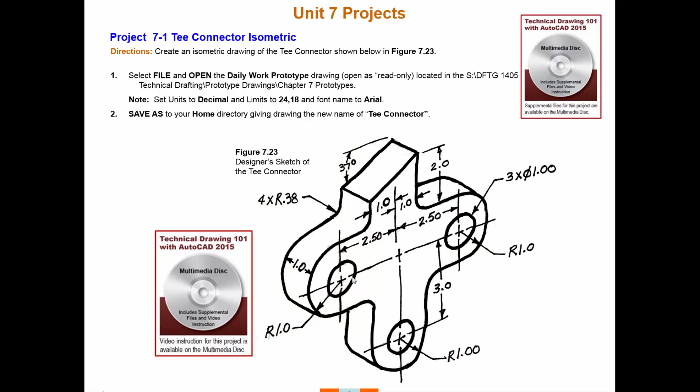So now that we've got this, looks good, let's go ahead and save our changes, and we'll come back into the drawing here. So this is what we're going to be drawing. You can see it's a basic T shape. If you flip the page, you'll see that what we're going to start off with is just your basic T, 5 by 3. So we're going to come back into here.

What we need to do first is actually get into the isometric mode. So I'm going to show you kind of the old school way to do it, and I'll show you the newer way to do it.

So when I'm setting up myself into the isometric mode, look at my crosshair right now. This is a regular, it's called the rectangular crosshair, rectangular snap, but it just looks like what you're used to. It's a vertical line and a horizontal line. If I were to draw a line right now and turn my ortho on, I'm locked into a perfectly horizontal line or a perfectly vertical line. I can't make it at an angle even if I tried. So we want to make sure that your ortho is on.

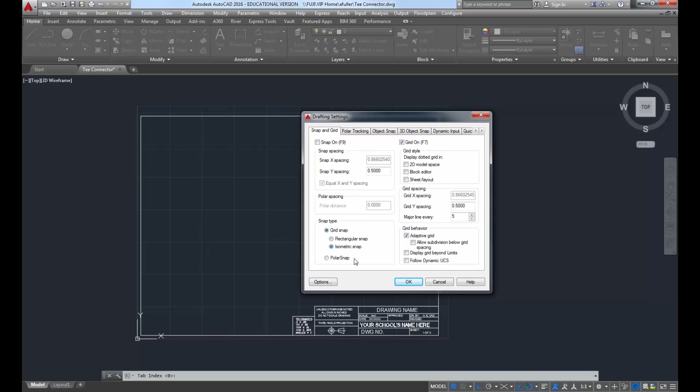We definitely want to use ortho when we're doing isometric. But we want to set ourselves into an isometric snap. So I'm going to click on this little button down here where my grid and my snap is, and I'm going to click on the settings, and I'm going to come in here. You can see I'm in rectangular snap. I can set myself to an isometric snap and say OK, and now look at my crosshair. So now I've got an isometric crosshair. So that's one way to do it.

I'm going to go turn that off just so you can see, put it back to rectangular and OK. So that's the way we used to teach it. But as of release, I think this changed in 2016, maybe 2015, they actually added it to the drafting settings down here.

So this guy right here, do y'all see this little button right there? This is how we can change it now. If you don't see that button, click on these little 3 bars right here to customize, and it is called Isometric Drafting. So this guy right here, if you don't see a check mark next to it, go ahead and click on it. If you see a check mark, then it is in your drafting settings toolbar down here. But what we're going to do now is just click on that little arrow next to it, and you can choose. We've got 3 options when we're looking at that crosshair.

So we've got ISO left, ISO top, and ISO right. Let's just select one and see. Notice how my grid is changing. This is what I was telling you. I'm going to turn my grid off because that's driving me crazy.

I'm going to draw a line here, and I've still got my ortho on. It's super important to keep that ortho on, but notice I'm able to draw a line perfectly at 30 degrees and perfectly at 150 degrees. I cannot draw a 90-degree line. I cannot draw anything but that 30 and 150.

If you press F5, it changes. So now I can draw a 90-degree line and a 30-degree line. I cannot draw a 150-degree line. Press F5 and you get to the third one where I can go 90 degrees and 150 degrees. I cannot go at 30 degrees.

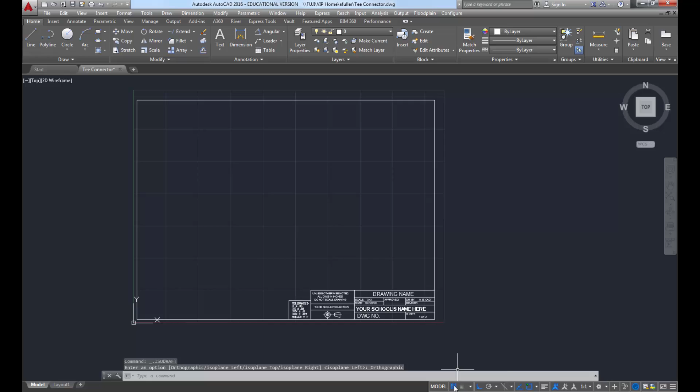I'm going to go ahead and turn off that grid. We don't really use it for this project. You're not snapping to it. You're welcome to leave yours on. I'm just going to turn mine off.

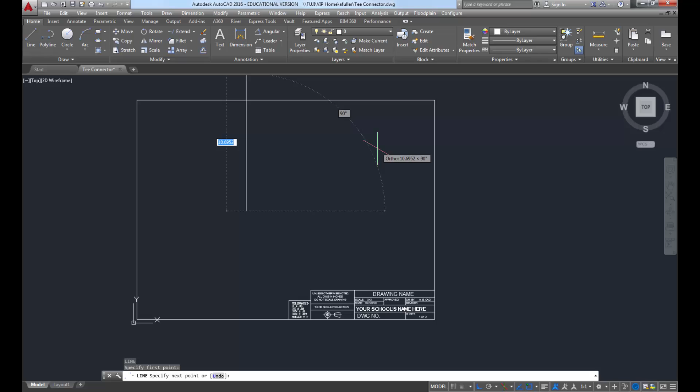So now that I've got this, I'm going to come in, turn on my isometric snap, and I'm going to draw my first line here. So I need to get this line to come over at 30 degrees, but it's not letting me because I have the wrong ISO snap right now. So I'm going to just hit F5 until I can get to the right angle. And I'm going to make this a distance of 5.

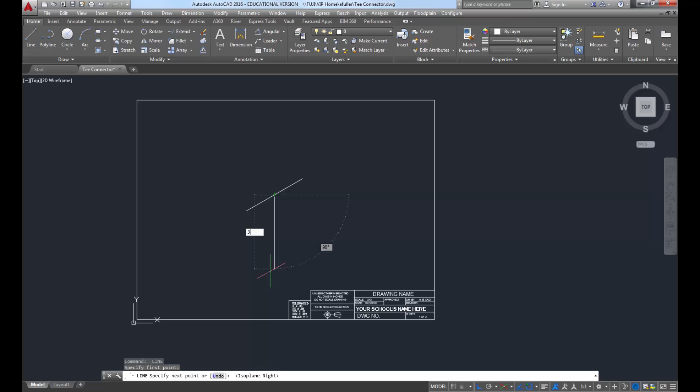I'm going to draw another line starting from here. This one needs to go perfectly straight down, so I'm going to hit F5 again. And this one has a distance of 3. So I'm starting off with that basic T shape.

Let's come back in here and you can see I've got my basic T shape. So it's 5 by 3. I snap to the midpoint instead of measuring 2.5 over. 2.5 is half of 5, so the midpoint O snap will work for you there.

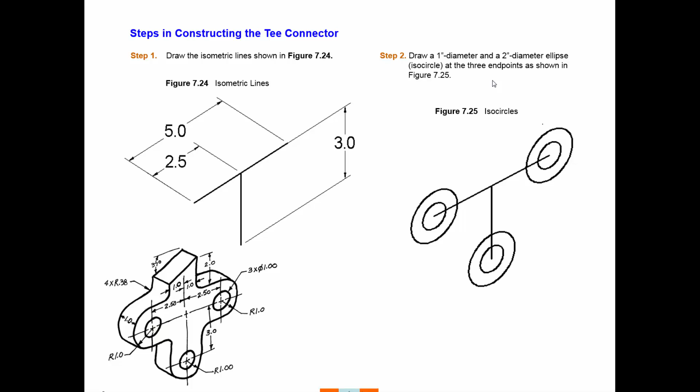The next thing that we have to do is we have to draw ISO circles. We need to get these little circles drawn in here, and the first one has a diameter of 1 inch. The second one has a diameter of 2 inches, but when we draw an ISO circle, it's not actually the circle command. It's an ellipse, but we have to start the ellipse command and then tell it it's going to be an ISO circle. So when we come over here, you're going to choose the axis end option of the ellipse command.

Right when you start that command, type I for ISO circle, we're going to snap it to the endpoint here, and you'll see if I press F5, the different ISO circles that we get. So this is the ISO right circle.

And we are going to type in the distance, or the dimension. So if I hit D, enter, because right now it's asking me for the radius, and I was given the diameter. So D, enter, 1, enter. So a diameter of 1.

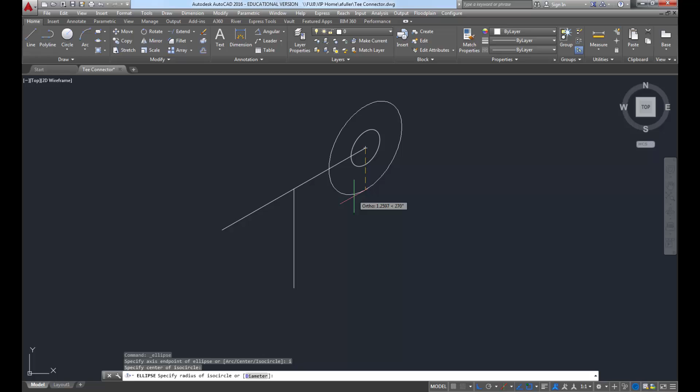Do the ISO circle again. Type I for ISO circle before you click anywhere. Now this time diameter of 2. If you forget to type D, enter, when you type in 1 and 2, it's going to do a radius of 1 and 2, and that's going to make your circles twice as big as they need to be. So be really, really careful. Look at your screen and make sure that your ISO circles look the same size as mine. If they're twice as big, you need to back it up and make sure that you chose the diameter command.

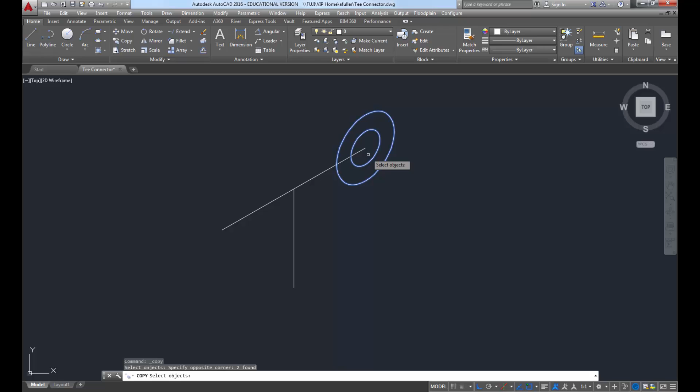Those same ISO circles are going to be at the endpoints of the rest of the T's, so you can either do the ISO circle command again, or I'm just going to say copy. They're the same size, so I'm going to copy with this center as my base point.

I'm going to copy one set here and one set over there. Press enter and I'm good. So the next step that we're going to do is we're going to get...

Next step is we're going to get these lines to come over, and I'm going to do this a little differently than the book instructs. The book has you draw a horizontal line, or a 30-degree line, right here and right here. I'm not going to do it that way. I think my way is easier.

Instead of drawing a line and having to draw it over here so I get an intersection to snap to, I'm just going to use the copy command. I'll select that guy. It doesn't matter where you choose as your base point because we're not snapping according to the base point - we're just going to type in a distance.

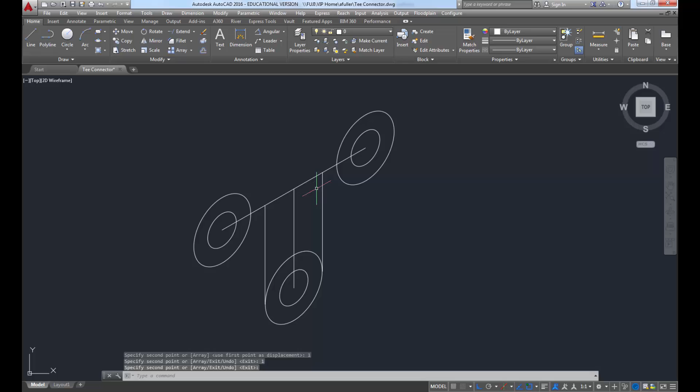If it had a diameter of 2, that gives it a radius of 1. So my distance is 1 here. I'm just going to copy this over a distance of 1, and copy it this way, a distance of 1. Select this guy - I'm going to go up a distance of 1 and then down a distance of 1, and I'm good.

So I've got my circles, I've got my lines, I've got everything I need. I don't need this little T anymore - that was just a construction line to get this thing started.

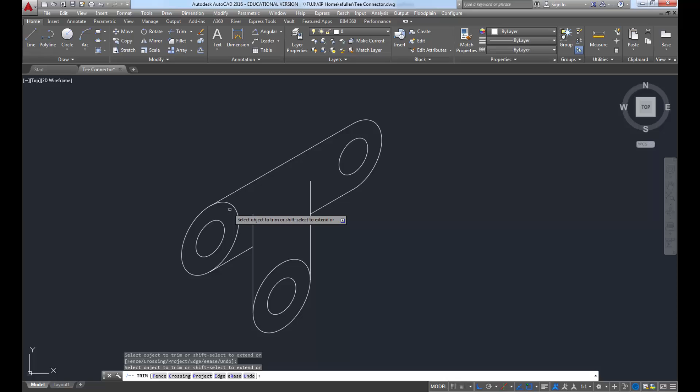Now I can also come in here and trim. I like to trim things as I go - that way it stays as uncluttered as possible. So I'm going to do my trim command. Just press enter when you start this command and it'll let you trim everything you need. I'm going to trim these guys, and that's looking good.

I'm going to leave these though - notice these vertical lines right here. I'm going to leave those because I'm going to use them in just a minute. I'm going to extend them up to this line here and here, and I'll end up trimming them out later, but I just need to know where to put that top part. That little top part I need to add has an angle of 37 degrees.

By now, hopefully you know that you can't do angles directly when you're in isometric, because we're already at an angle. So typing in 37 degrees won't really come out right. So what we're going to end up doing is, we'll just draw this out over to the side.

The distance from here to here is 2, so I'm just going to draw a line. I need to get myself set into rectangular O-snap. Now I'm going to draw a line.

I'm going to go over 2 - the dimension it tells me is 2 for this line over here. And then it tells me 37 degrees. So I can do a couple different things. I can either do a 37 degree line...

That's 37 degrees, and I can shoot it backwards, or extend it backwards, to find out what we're really trying to get, which is the length of this line right here. So I can shoot it backwards and then just trim everything and get that length. Let's do that.

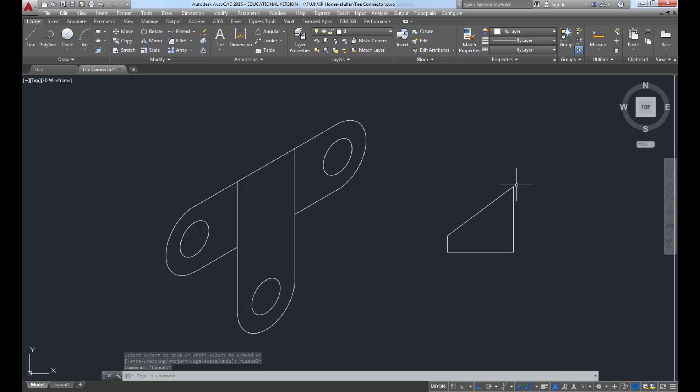I just need some sort of line here, and then I can extend it and trim it - either way you want to do it is right. You can either go up the 37 degrees and then back it up, or you can do some math and add 37 to 180. Either way, there's no right or wrong way to do this.

Now what we're going to do is use the move command. I know I've got the length of this line correct, and I know I've got the length of this line correct. So I'm just going to move this guy from here to here, and move this guy from here to here, and then I'll just connect the dots from here to here.

So that's perfect - now I don't need this anymore. I'm going to use my trim command and trim out this little middle part here.

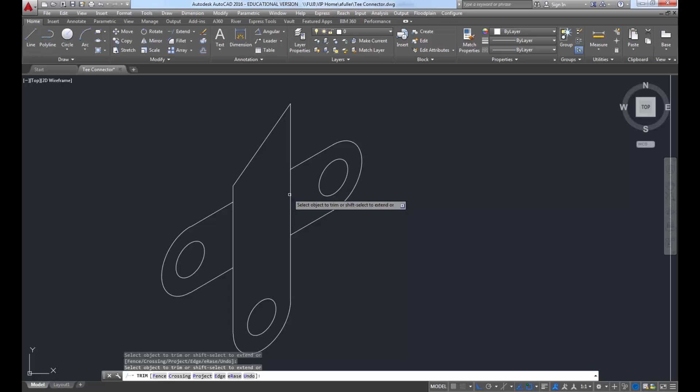Okay, this looks great. So now what I'm going to do is the fillet. Let's come in here and look at the slide. I've done this part, this is what it's talking about.

So we need to do a distance of 2, a distance of 2. We did the 37 degrees. We just needed to figure out how long this line is. So now that we've got that there, it all looks good.

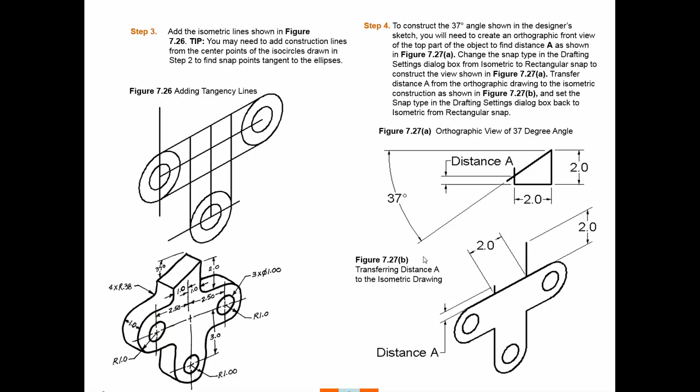The next step that we're going to do is, it says to trim here is step 5. We already did that. Step 6, with the ortho on, we're going to make construction lines at 0.38. So we've got a radius of 0.38 here.

Remember, in isometric, we cannot use the fillet command, which is a total bummer. Hopefully by now you love the fillet command. So what we're going to have to do is kind of work around that.

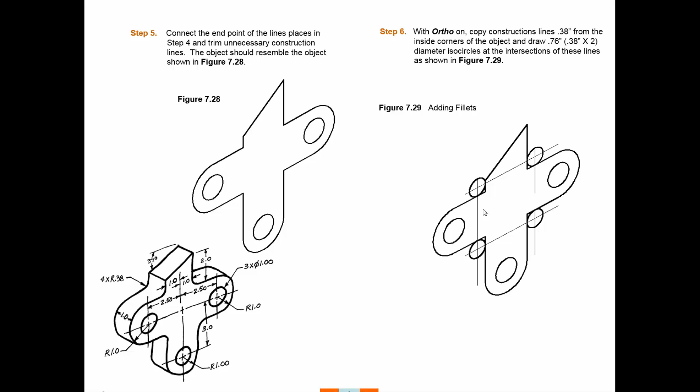So we're going to have to copy over construction lines at 0.38. And then we're going to have to do an ISO circle and then trim from there. So we're going to go back to the drawing here.

And I'm just going to use my regular old copy command. And right now, oops, I'm not in isometric. So let's turn on isometric and do that copy command.

Over and a distance of 0.38. And I'm just going to keep repeating until I get all the construction lines that I need. So that's going to go over 0.38. Remember to keep your ortho on, this is super, super important.

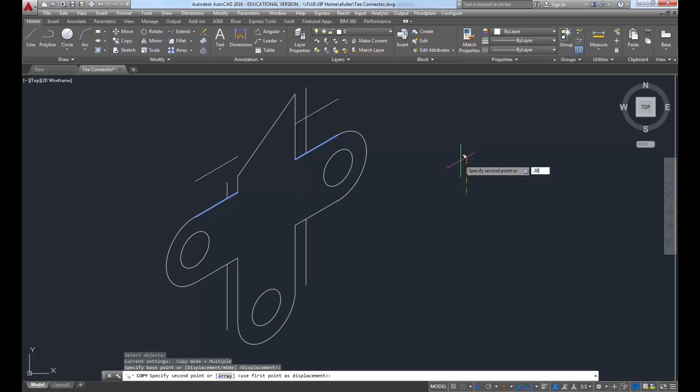Alright, so I've got all the construction lines that I need. Now I'm going to do my ISO circle. Start that axis end ellipse command, type I for ISO circle.

Let's zoom in here. The center of it is going to be right here. You can either type 0.38 to make sure you've got it, or you can snap to the end point of that line if you're sure that your offset was good.

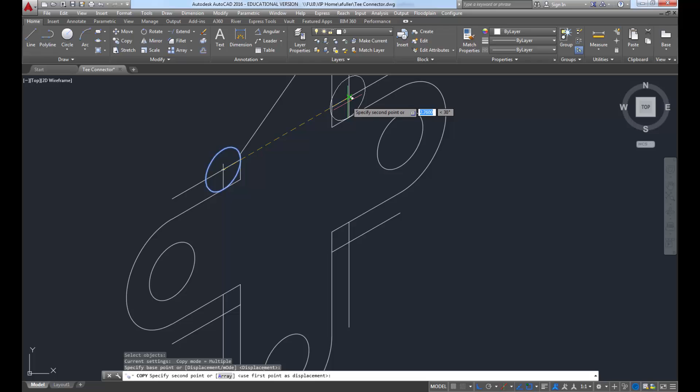0.38. And now what I'm going to do is just copy that ISO circle. You can redraw the ISO circle if you want, but once you've got it drawn once, let's just copy it to all of those four corners.

I don't need my construction lines anymore, so I'm going to delete out those construction lines. And I'm going to trim. That trim command stays active, so we'll just trim.

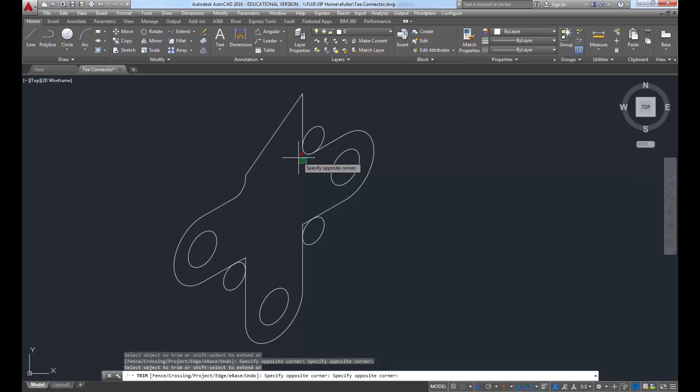Alright, that looks good. So we've got the front face of this. Now we just have to copy it back to give it some depth. So let's go check out our slideshow.

We've done step 6. Now step 7. Once you've trimmed them all out, we are going to copy this thing back. So the depth that we're going to copy it back is 1 inch, and it actually shows you in this picture which lines you can use to do that copy command.

You could copy the whole thing, but you'll end up having to delete out extra lines that you really didn't need. So you can just go by this picture to see what you need to copy back.

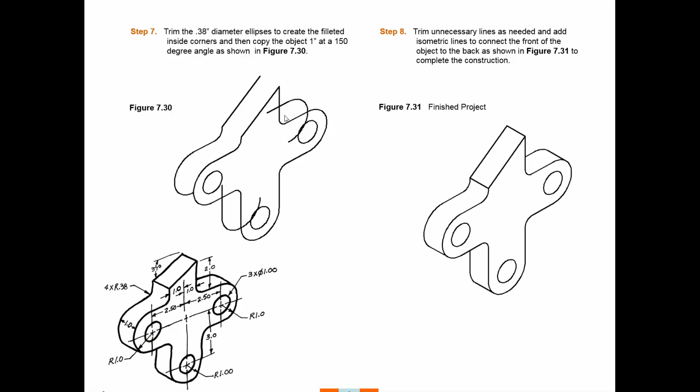Come back into my drawing here, and I'm going to start that copy command. I'm going to select the lines that I need to copy. So it's this, all of that, this guy right here, this and this, and then this and this. And I believe that's all I need in order to do that copy command.

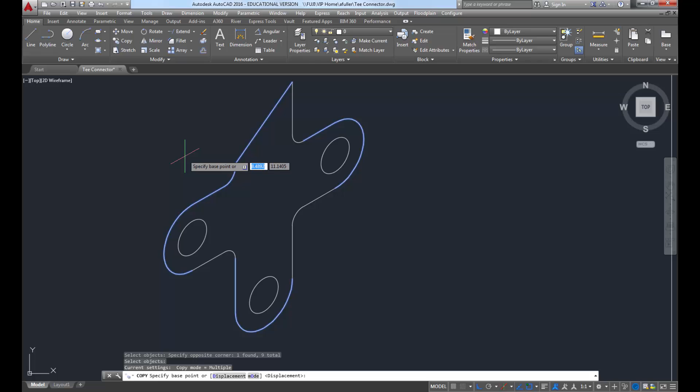Select a base point, it can be anywhere on the drawing. And I'm going to hit F5 so that I can head this direction. So I'm doing my ISO left distance of 1, and I've got it. I'm going to draw some lines to just connect it where it needs to be connected.

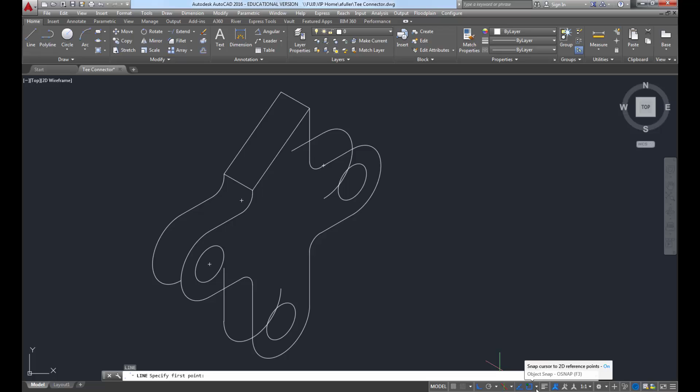Now one thing I do want to turn on is, go to my O snaps here, and let's turn on the quadrant O snap. That way I can snap from quadrant to quadrant here, quadrant to quadrant here, quadrant to quadrant here. I'm almost done.

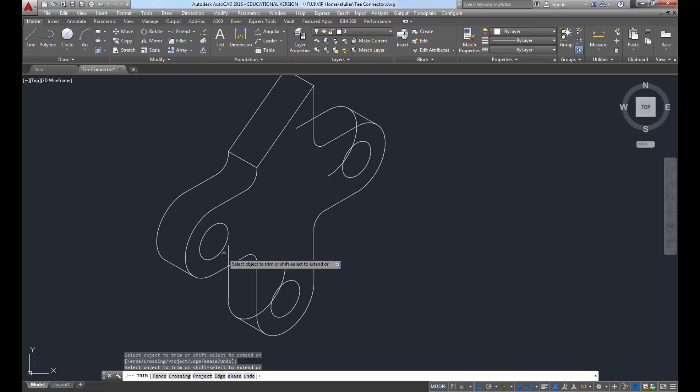Now I just need to go trim out what I don't need. So I'm going to use my trim command. I'm just going to press enter so that it trims all the way through. There we go, I've got it.

So that's a completed Tee connector. All you need to do now is just come over here, fill out the information, and print it out and submit it to your teacher.